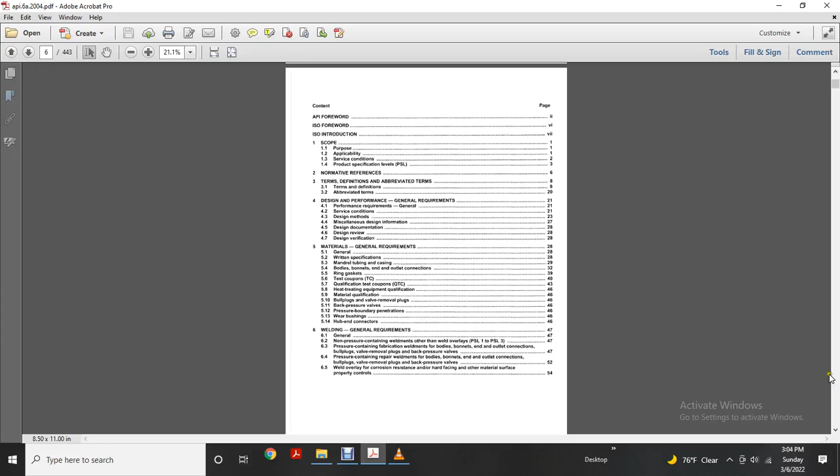Applicability, service conditions, product specification levels. 1. 2. Normative references. 3. Terms and definitions approved, abbreviated terms. 4. Design, performance, general requirements, general, service conditions, design method, miscellaneous, design information, design documentation, design review, design verification.

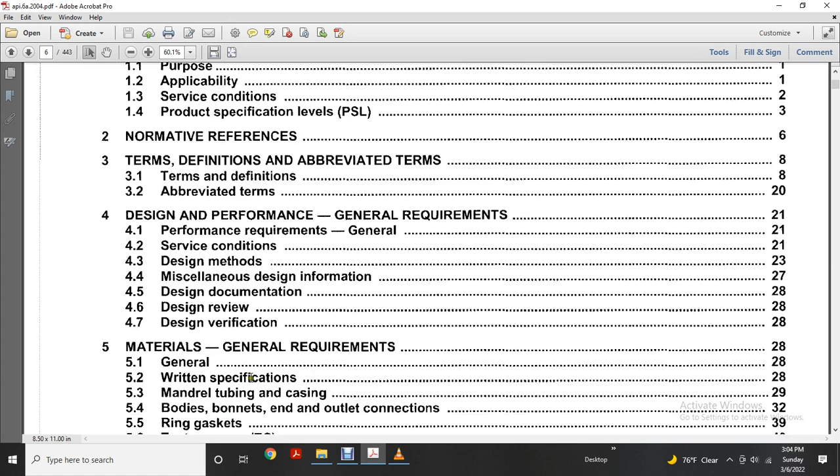Materials, general requirements, general written specification, mandrel tubing, casing, base, bodies, bonnets, outlet connections, ring gaskets, test coupons, qualification test coupons, heat-treating equipment qualification, material qualification, bull plugs, valve removal plugs, back pressure valves, pressure boundary, penetrations, wear bushings.

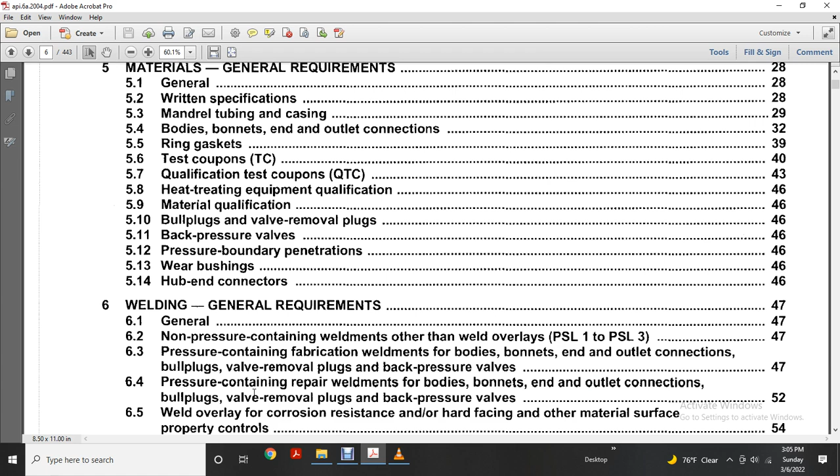Hub ended connectors, welding, general requirements, general non-pressure containing weldments other than weld overlays, PSL 1 to PSL 3. Pressure containing fabrication weldments for bodies, bonnets, end and outlet connections, bull plugs, valve removal plugs, back pressure valves. Pressure containing repair weldments, bodies, bonnets, end and outlet connections, weld overlay, corrosion resistant and or hard facing other materials.

For the property controls. 7. Quality control, general measuring, testing equipment, general quality control, personnel qualifications, personnel control requirements, general quality control required, records requirement.

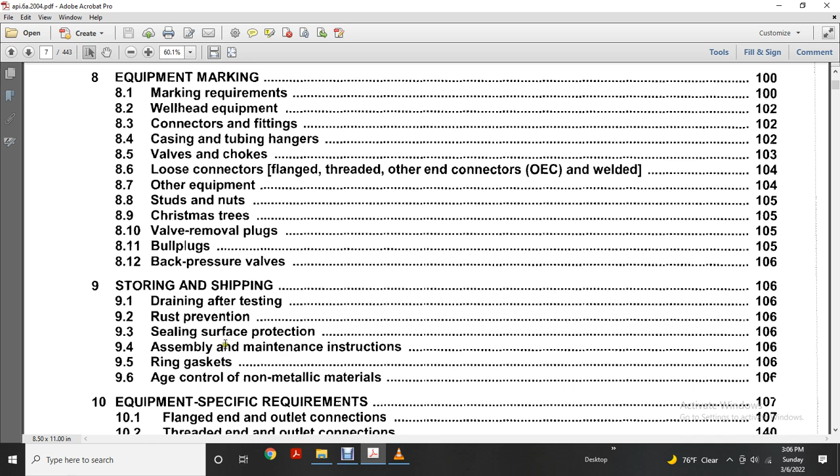Equipment marking requirements, wellhead equipment connectors, fittings, casing, tubing hangers, valves, chokes, loose connectors, flanged, other end connectors, welded, other equipment, studs, nuts, Christmas trees, valve removal plugs, bull plugs, back pressure valves, storing and shipping, draining and testing, draining after testing, rust prevention, sealing, surface protection, assembly, maintenance, and instruction, ring gasket, age control, non-metallic materials.

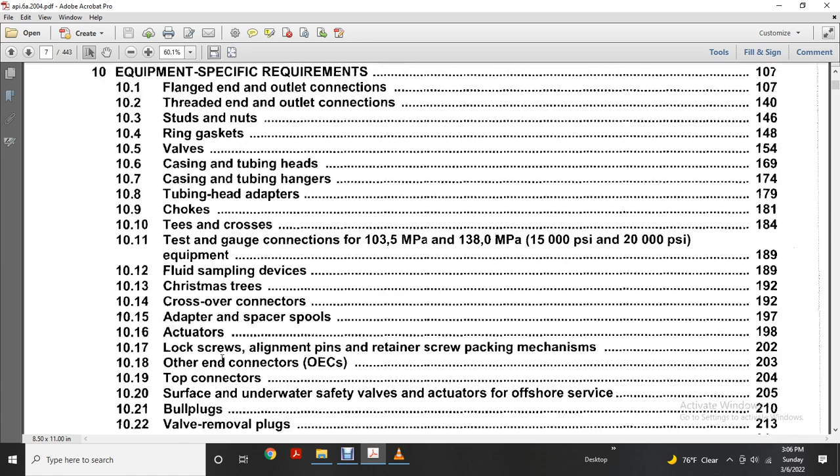10. Equipment-specific requirements, flange end outlet connection, thread end outlet connection, studs and nuts, ring gasket, valves, casing and tubing heads, casing and tubing hangers, tubing-head adapters, chokes, tees and crosses, test gauge connections, 103.5 MPa to 138 MPa, or 15,000 psi to 20,000 psi, fluid sample device, Christmas tree, crossovers, connectors, adapters, spools, actuator, lock screws.

Alignment pins, retaining screws, packing mechanism, other end connectors or OECs, top connectors, surface and underwater safety valves, actuators, offshore, surface bull plugs, valve removal plugs, other pressure boundary, penetration, back pressure valves.

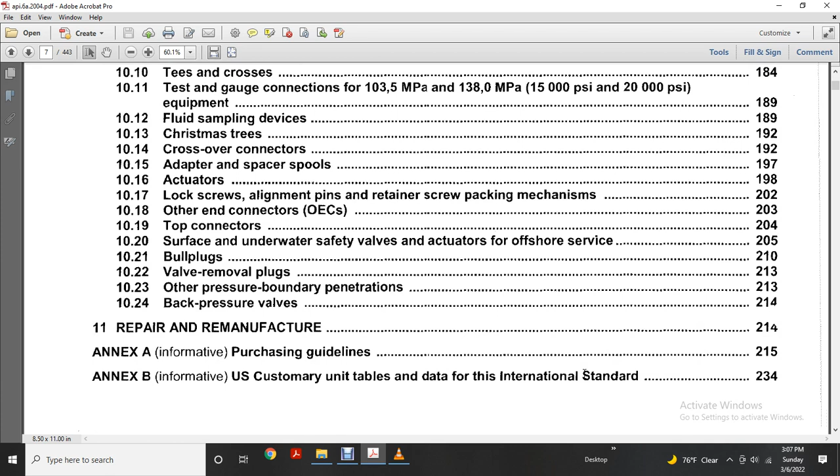Purchasing guidelines, U.S. customary unit table of data, international standard. And these are appendixes, and we'll start out with paragraph chapter 1, after the foreword, introduction.

Petroleum, natural gas industries, drilling and production equipment, wellhead Christmas tree equipment scope. The purpose of the international standards specifies requirements given the recommendation, performance, dimensional with a functional, interchangeable design, material with the testing, inspection, welding, marking, handling, storage, shipment, purchasing, repair and remanufacture, wellhead Christmas tree equipment for use in the petroleum, natural gas industry.

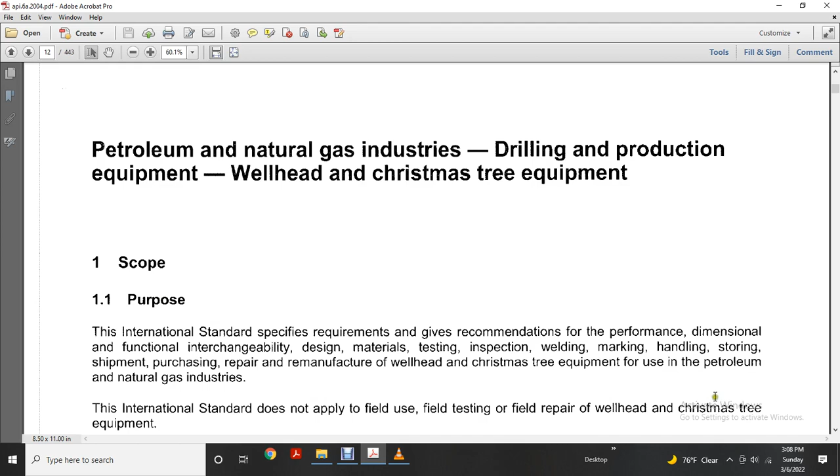International standards do not apply to field testing, field repair, wellhead Christmas tree equipment. Applicability of international standards applicable to the following specific equipment: wellhead equipment, casing head housing, casing head spools, tubing.

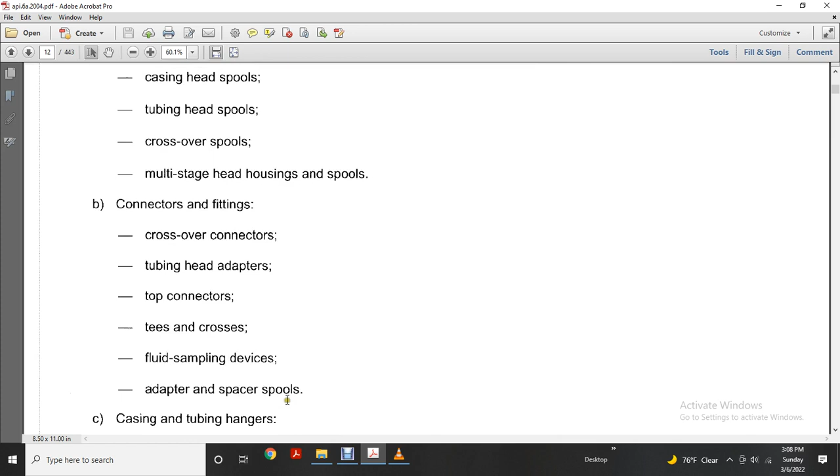Head spools, crossover spools, multiple stage head housings and spools, connector fittings, crossover connectors, tubing head adapters, top connectors, tees and crosses, fluid sample devices, adapters, spacers and spools, casing, tubing hangers, mandrel hangers and slip hangers, valves and chokes, single valve, multiple valves, actuated valves, valves prepared for actuator, check valve, chokes, surface and underwater safety valves, actuator.

Back pressure valves, loose connection, flange, threaded, other end connectors and welded, weld neck connectors, blind connectors, threaded connectors, adapter spacer connectors, bullplugs, valve removal plugs, other equipment actuators, hubs, pressure boundary, penetrations, ring gasket, running, testing tools, Annex H, wear bushings and Annex H.

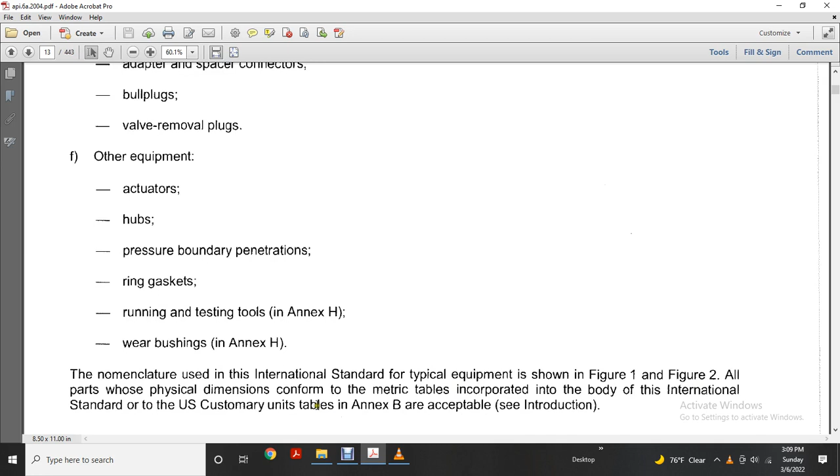Nomenclature used in the international standards for the typical equipment shown in Figure 1 and 2, all parts whose physical dimension conform with the metric tables incorporated with the body of the international standards or the U.S. customary unit tables in Annex B, or we'll see this introduction.

1.3 Service conditions. International standards define service conditions, in terms of pressure, temperature, material class for the well-bore constituents, and operating conditions. 1.4 Product specification levels, or PSL.

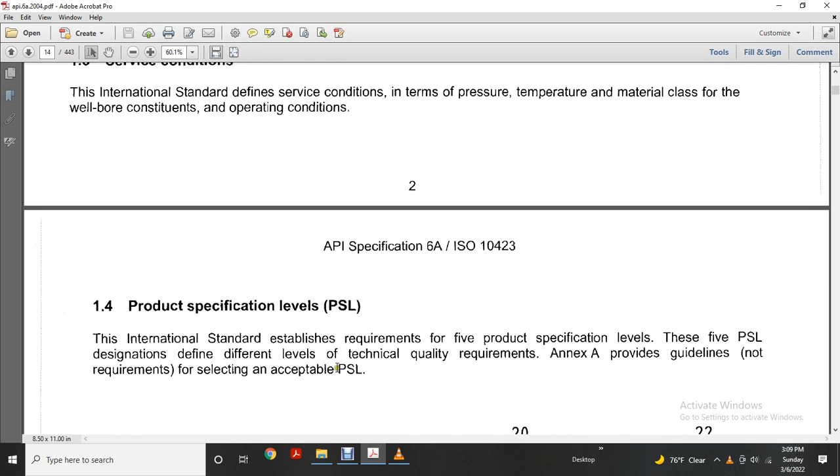International standards establish requirements of 5 product specification levels. These 5 product specification level designations define different levels of technical quality requirements. Annex A provides guidelines, not requirements, for selecting acceptable product specification levels. And it shows the different pictures.

Typical wellhead assembly nomenclature.

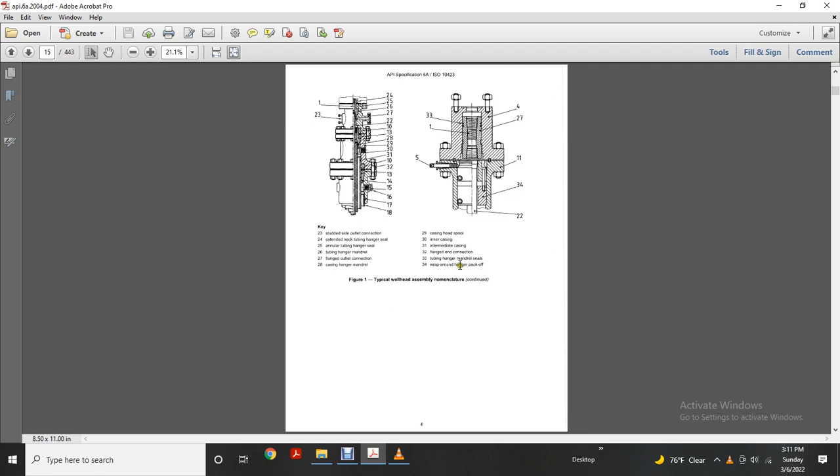2, normative references. We'll read this as part of 1 because 1 was small. The following referenced documents are indispensable for the application of this document. For dated references, only the edition cited applies. For undated references, the latest edition of the referenced document, including any amendments, applies. ISO 2859-1:1999, Sampling procedures for inspection by attributes, Part 1: Sampling schemes indexed by acceptance quality limit for lot-by-lot inspection.

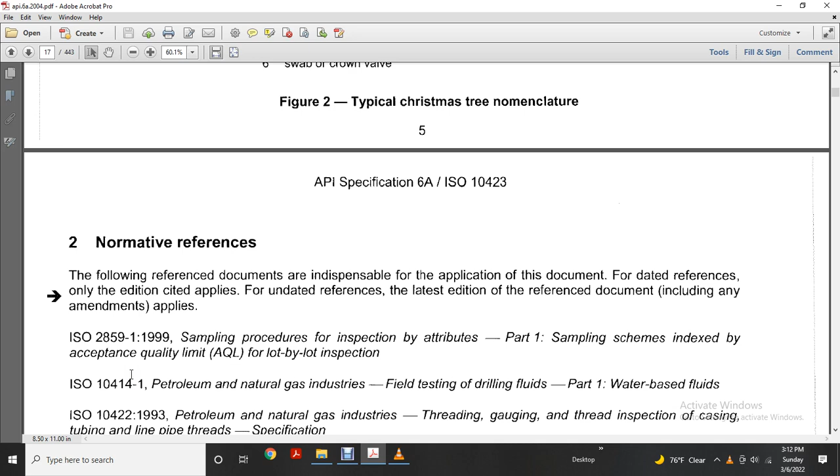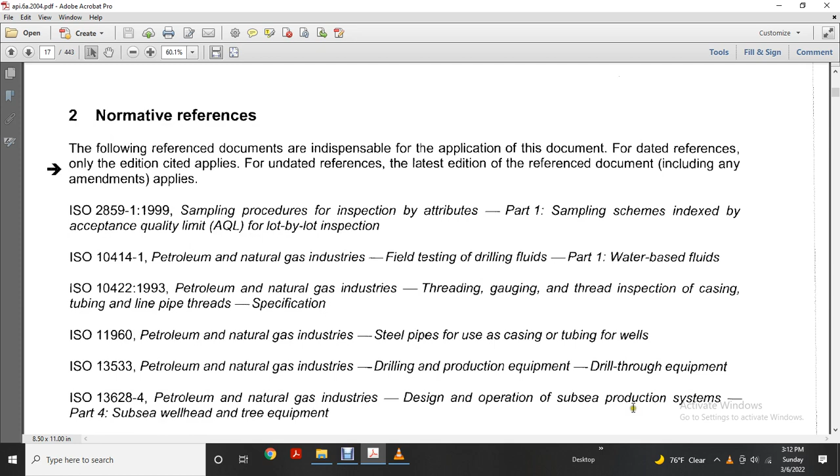ISO 10414-1, Petroleum and natural gas industries, Field testing of drilling fluids, Part 1: Water-based fluids. ISO 10422:1993, Petroleum and natural gas industries, Threading, gauging and thread inspection of casing, tubing and line pipe threads, Specification. ISO 11960, Petroleum and natural gas industries, Steel pipes for use as casing or tubing for wells. ISO 13533, Petroleum and natural gas industries, Drilling and production equipment, Drill-through equipment. ISO 13628-4, Petroleum and natural gas industries, Design and operation of subsea production systems, Part 4: Subsea wellhead and tree equipment.

ISO 13678, Petroleum and natural gas industries, Evaluation and testing of thread compounds for use with casing, tubing and line pipe. API Spec 7, 1997, Specification for rotary drill stem elements. American Petroleum Institute Recommended Practice 14F, Recommended practice for design and installation of electrical systems for fixed and floating offshore petroleum facilities for unclassified and Class 1, Division 1 and Division 2 locations. American Society of Mechanical Engineers B1.1, Unified inch screw threads.

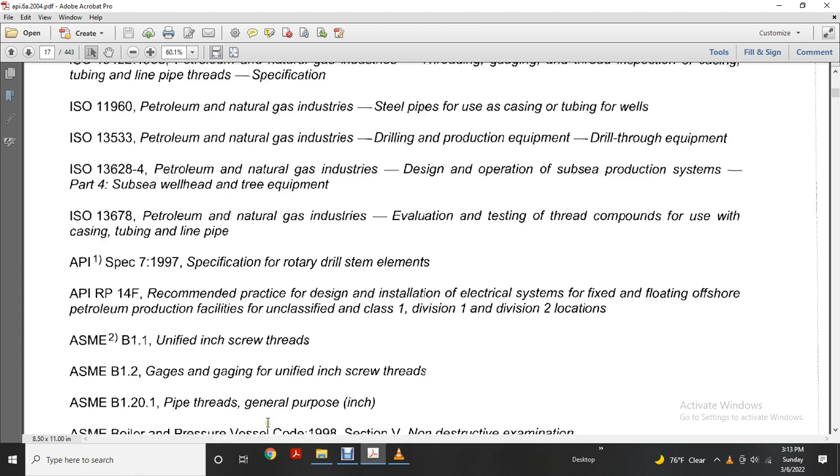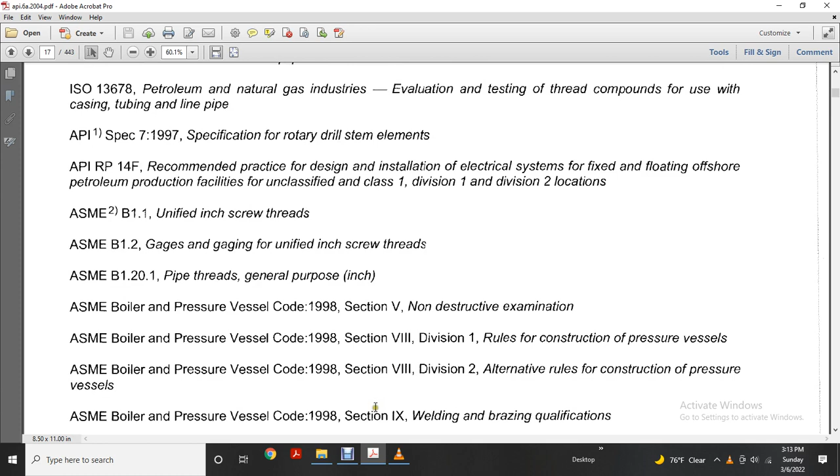B1.2, Gauges and gauging for unified inch screw threads. B1.20.1, Pipe threads, general purpose, inch. American Society of Mechanical Engineers Boiler and Pressure Vessel Code 1998, Section V, Nondestructive examination. Boiler and Pressure Vessel Code 1998, Section VIII, Division 1, Rules for construction of pressure vessels. Section VIII, Division 2, Alternative rules for construction of pressure vessels. Boiler and Pressure Vessel Code 1998, Section IX, Welding and brazing qualifications. ASNT SNT-TC-1A, Personnel qualification and certification in nondestructive testing.

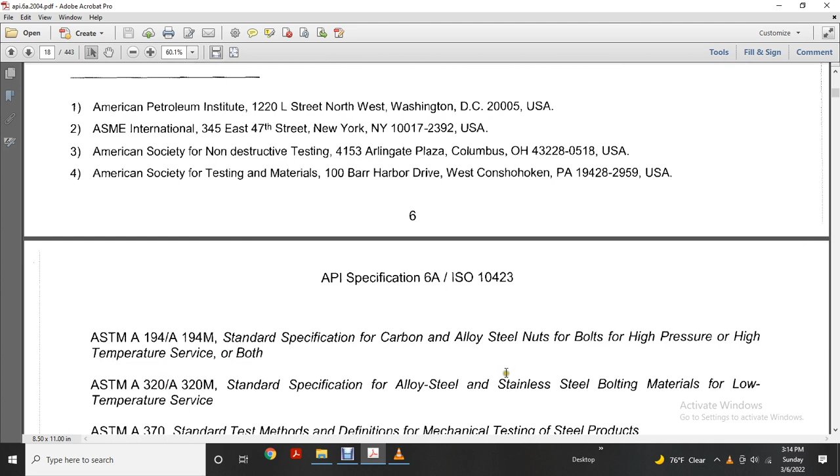American Society for Testing and Materials A193/A193M, Standard specification for alloy steel and stainless steel bolting materials for high temperature service. ASTM A194/A194M, Standard specification for carbon and alloy steel nuts for bolts for high pressure or high temperature service, or both. ASTM A320/A320M, Standard specification for alloy steel and stainless steel bolting materials for low temperature service. ASTM A370, Standard test methods and definitions for mechanical testing of steel products. A388/A388M, Standard practice for ultrasonic examination of heavy steel forgings.

ASTM A453/A453M, Standard specification for high temperature bolting materials with expansion coefficients comparable to austenitic stainless steels. A703/A703M, Standard specification for steel castings, general requirements, for pressure-containing parts. ASTM D395, Standard test methods for rubber property, compression set. D412, Standard test methods for vulcanized rubber and thermoplastic elastomers, tension. D471, Standard test method for rubber property, effect of liquids. D1414, Standard test methods for rubber O-rings. D1415, Standard test method for rubber property, international hardness. D1418, Standard practice for rubber and rubber latices, nomenclature.

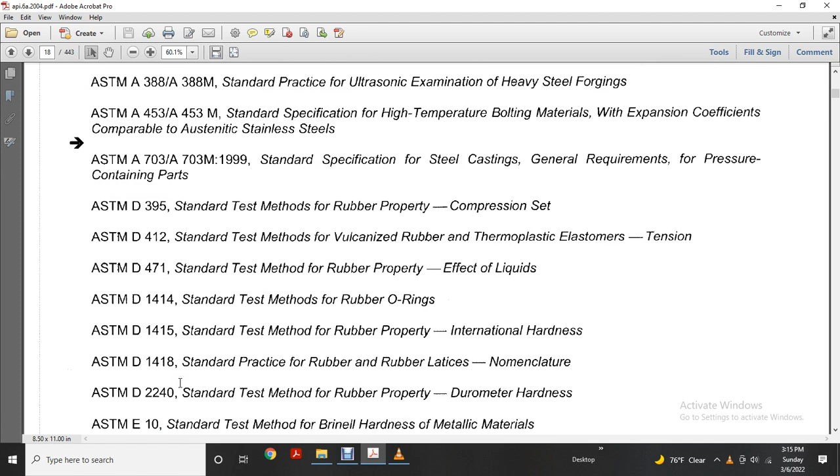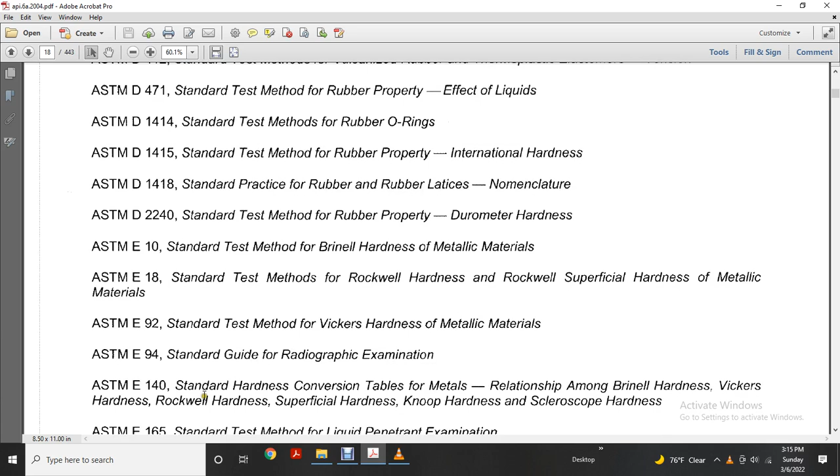D2240, Standard test method for rubber property, durometer hardness. E10, Standard test method for Brinell hardness of metallic materials. E18, Standard test methods for Rockwell hardness and Rockwell superficial hardness of metallic materials. E92, Standard test method for Vickers hardness of metallic materials. E94, Standard guide for radiographic examination. E140, Standard hardness conversion tables for metals, relationship among Brinell hardness, Vickers hardness, Rockwell hardness, superficial hardness, Knoop hardness, and scleroscope hardness. E165, Standard test method for liquid penetrant examination.

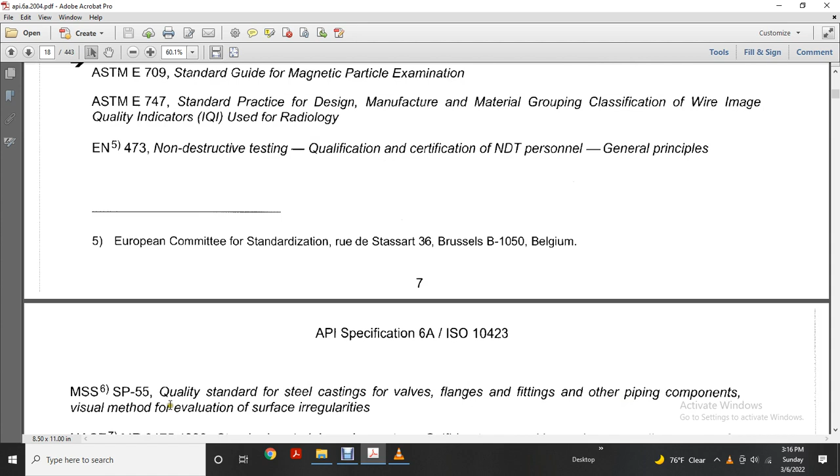E428, Standard practice for fabrication and control of steel reference blocks used in ultrasonic examination. E709, Standard guide for magnetic particle examination. E747, Standard practice for design, manufacture and material grouping classification of wire image quality indicators used for radiology. EN 473, Non-destructive testing, qualification and certification of NDT personnel, general principles. MSS SP-55, Quality standard for steel castings for valves, flanges, fittings, and other piping components, visual method for evaluation of surface irregularities. NACE MR0175, 1999, Standard material requirements, sulfide stress cracking resistant metallic materials for oilfield equipment. The Society of Automotive Engineers, AS568A, 1974, Aerospace size standard for O-rings.

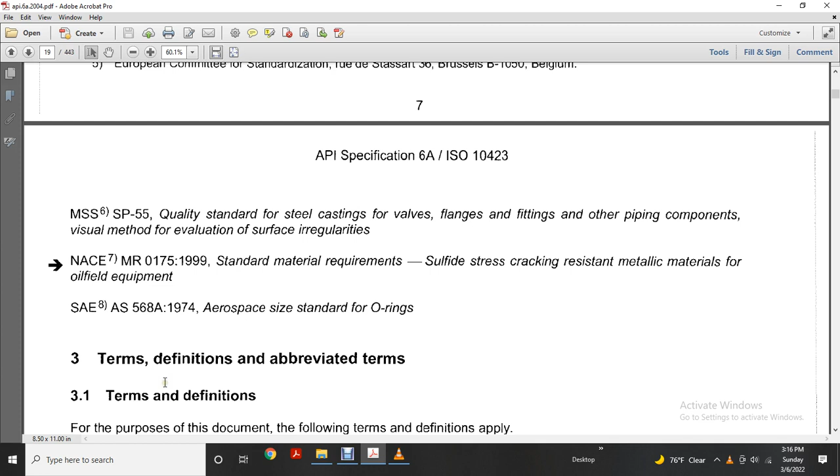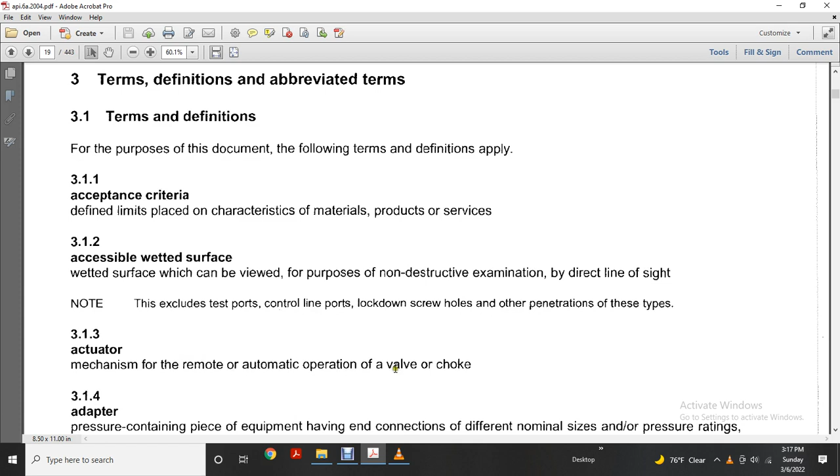And we'll continue to read terms and definitions, abbreviated terms. For the purpose of this document, the following terms and definitions apply. Acceptance criteria: defined limits placed on characteristics of materials, products or services. Accessible wetted surface: wetted surface which can be viewed for the purpose of non-destructive examination by direct line of sight. Note: these exclude test ports, control line ports, lockdown screw holes and other penetrations of these types. Actuator: mechanism for the remote or automatic operation of a valve or choke. Adapter: pressure-containing piece of equipment having end connections of different nominal sizes or pressure ratings, used to connect other pieces of equipment of different nominal sizes and/or pressure ratings.

Annular pack-off: the mechanism that seals the annular pressure between the outside diameter of the suspended tubular member or hanger and the inside diameter of the head or spool through which the tubular member passes or the hanger is suspended. As-shipped condition: the condition of the product or equipment when it is ready to ship.

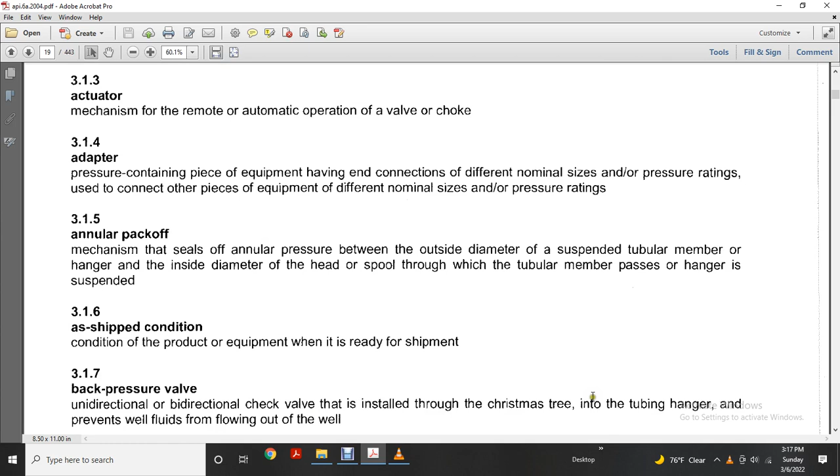Back pressure valve: a unidirectional or bidirectional check valve installed through the Christmas tree into a tubing hanger that prevents well fluids from flowing out of the well. Body: any portion of the wellhead and Christmas tree equipment between the end connections, with or without internal parts, that contains wellbore pressure. Bolting: closure threaded fasteners used to assemble the wellbore pressure-containing parts or join end and outlet connections.

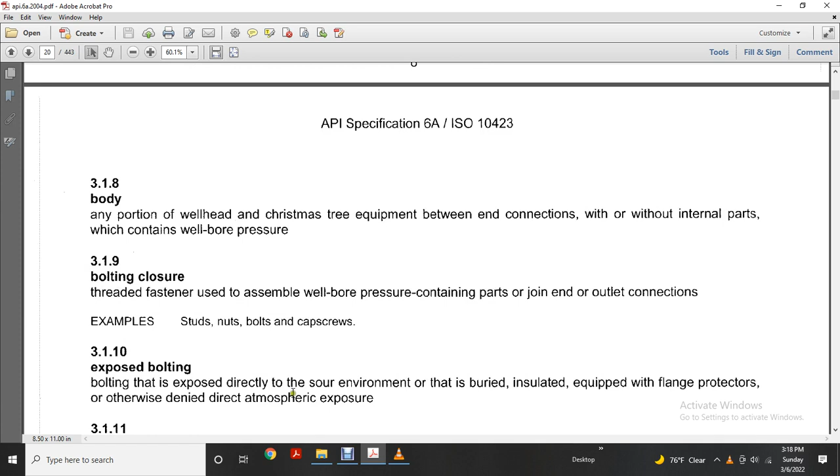Exposed bolting: bolting that is exposed directly to a sour environment, or that is buried, insulated, equipped with flange protectors, or otherwise denied direct atmospheric exposure. Non-exposed bolting: bolting that is not directly exposed to sour environments and is not intended to be buried, insulated, equipped with flange protectors, or otherwise denied direct atmospheric exposure.

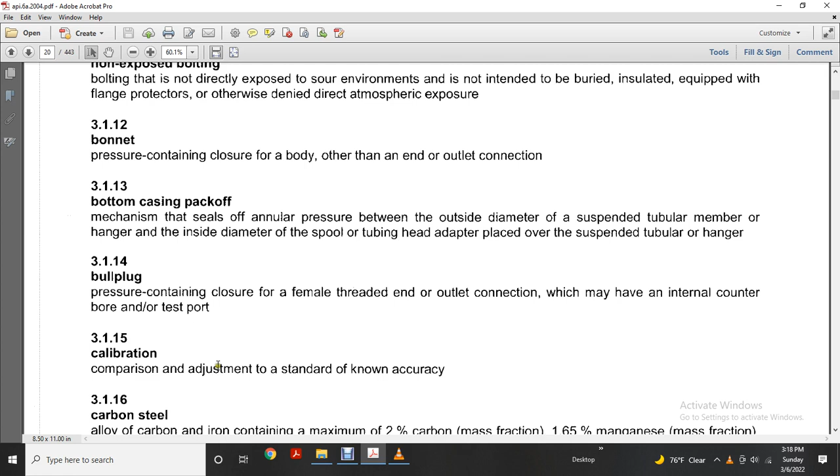Bonnet: pressure-containing closure of a body, other than an end or outlet connection. Bottom casing pack-off: mechanism that seals the annular pressure between the outside diameter of the suspended tubular member or hanger and the inside diameter of the spool or tubing head adapter placed over the suspended tubular or hanger. Bull plug: pressure-containing closure for a female threaded end or outlet connection, which may have an internal counterbore and test port. Calibration: comparison and adjustment to a standard of known accuracy.

Carbon steel: alloy of carbon and iron containing a maximum of 2% carbon mass fraction, 1.65% manganese mass fraction, and residual quantities of other elements, except those intentionally added in specific quantities for deoxidation, usually silicon and/or aluminum. Casing: pipe run from the surface intended to line the walls of a drilled hole.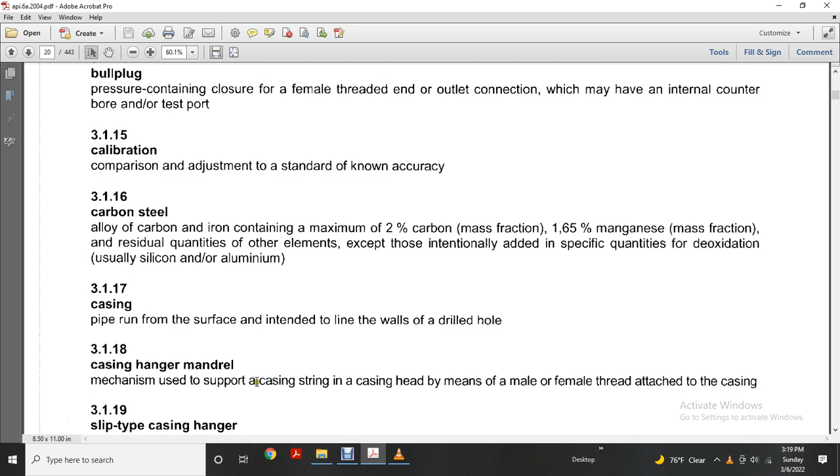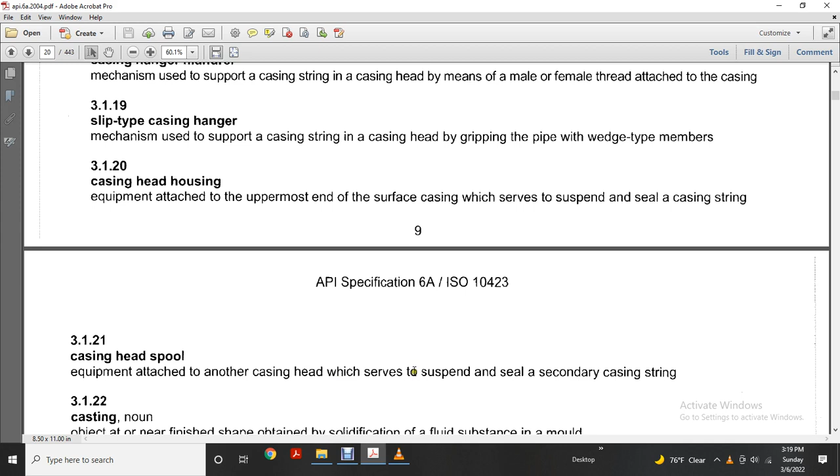Casing hanger mandrel: mechanism used to support a casing string in a casing head by means of a male or female thread attached to the casing string. Slip-type casing hanger: mechanism used to support a casing string in a casing head by gripping the pipe with wedge-type members. Casing head housing: equipment attached to the uppermost end of the surface casing which serves to suspend and seal a casing string. Casing head spool: equipment attached to another casing head which serves to suspend and seal a secondary casing string.

Casting, noun: object at or near finished shape obtained by solidification of a fluid substance in a mold. Note: HIP components are not considered to be castings. Chemical analysis: determination of the chemical composition of the material.

Choke: equipment used to restrict and control the flow of fluids. Choke bean, flow bean: replaceable orifice part used in positive chokes to control flow rate. Choke trim: pressure-controlling choke components, including choke beans, used to control or regulate the flow of fluids. Note: one-piece stems or segments of multi-piece stems that pass through the pressure boundary are pressure-containing components.

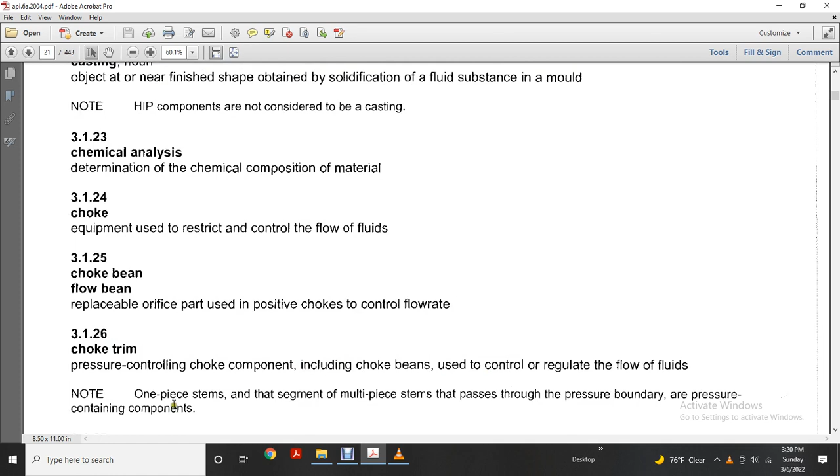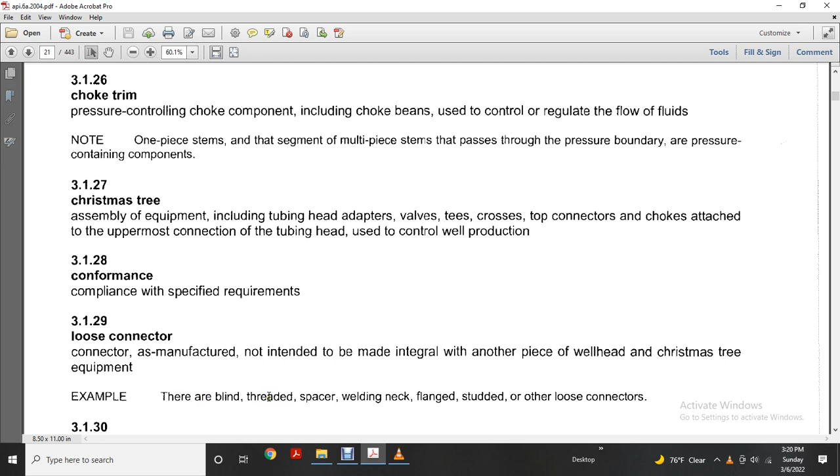Christmas tree: assembly of equipment, including tubing head adapters, valves, tees, crosses, top connectors and chokes, attached to the uppermost connection of the tubing head, used to control well production. Conformance: compliance with specified requirements. Loose connector: connector as manufactured that is not intended to be made integral with another piece of wellhead or Christmas tree equipment. Note: examples are blind, threaded, spacer, welding neck, studded, or other loose connections.

Corrosion-resistant alloy or CRA: non-ferrous-based alloy in which any one or the sum of the specified amounts of the elements titanium, nickel, cobalt, chromium, and molybdenum exceeds 50% mass fraction.

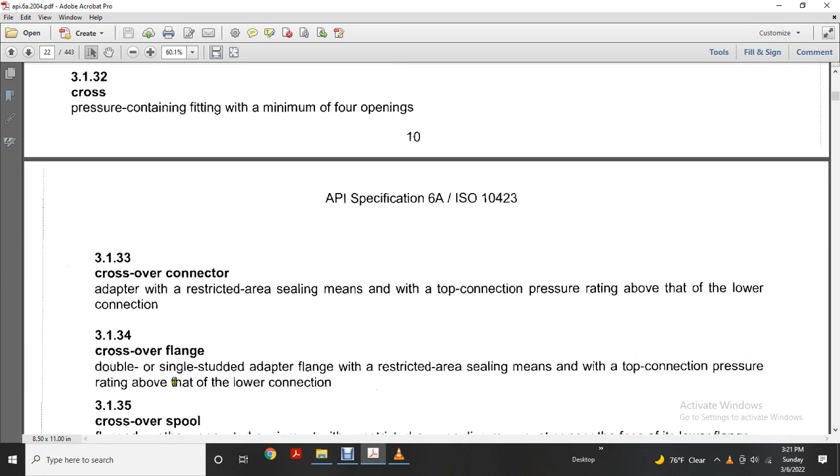Corrosion-resistant ring grooves: ring grooves lined with a metal resistant to metal-loss corrosion, a corrosion-resistant alloy or austenitic stainless steel. Cross: pressure-containing fitting with a minimum of four openings. Crossover connector: adapter with a restricted-area sealing means and with a top connection pressure rating above that of the lower connection. Crossover flange: double- or single-studded adapter flange with a restricted-area sealing means and with a top connection pressure rating above that of the lower connection. Crossover spool: flanged or other connected equipment with a restricted-area sealing means at or near the face of the lower flange.

Note: crossover spools are provided with a suitable means to suspend and seal around an inner string of casing or tubing, with the top connection pressure rating above that of the lower connection. Date of manufacture: date of the manufacturer's final acceptance of finished equipment. Date of repair or remanufacture: date of the repairer or remanufacturer's final acceptance of finished equipment.

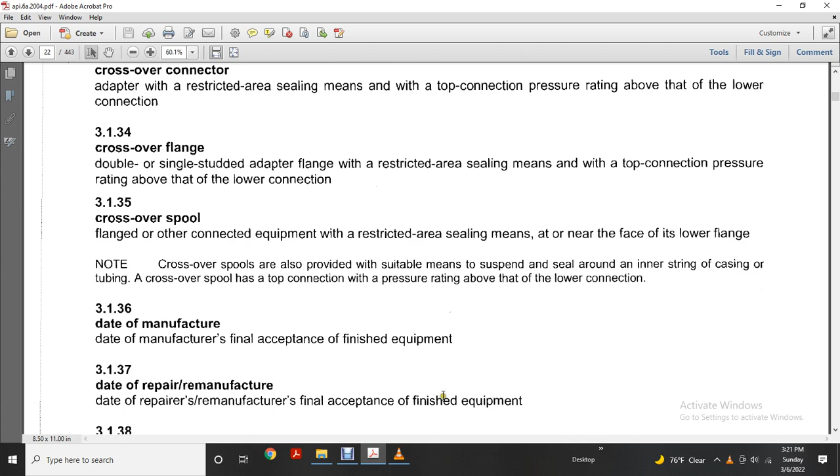Dynamic seal: seal in which motion exists relative to the sealing surface after installation. End connection, outlet connection: integral male or female thread, hub end connector, flange, studded, threaded, or through-bolted, or any other means used to join together equipment that contains or controls pressure.

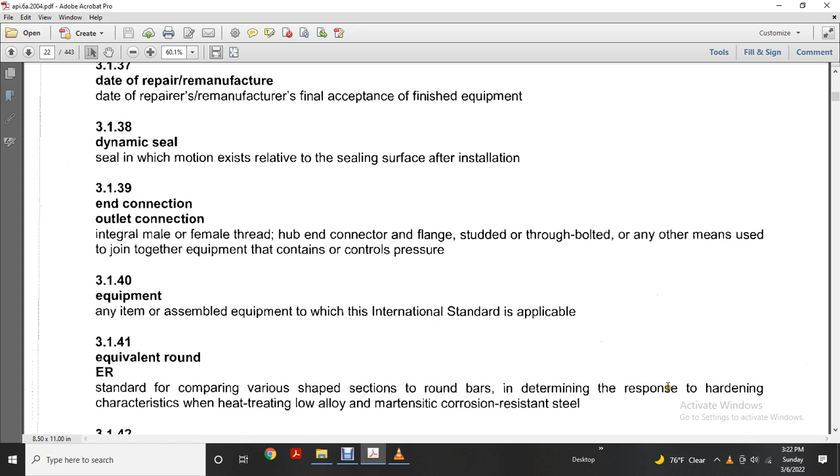Any item assembled equipment to which this International Standard is applicable. The equivalent round, or ER, standard for comparing various shapes of section to the round bar, in determining the response to hardening characteristics when heat treating low alloy and martensitic corrosion resistant steel. Fit: the geometric relation between parts. Note that this includes the tolerance criteria used during the design of a part and its mating part.

Flange: protruding rim with holes to accept bolts, having a sealing mechanism, used to join pressure containing equipment, with dimensions specified by the international standards. Blind flange: flange with no center bore, used to completely close off a flanged end or outlet connection. Loose flange: flange not intended to be made integral with the equipment component, per the international standard.

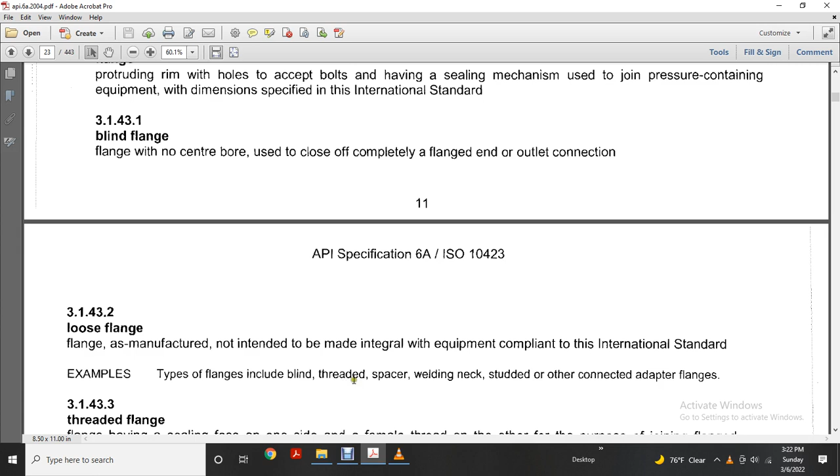The types of flange include blind, threaded, spacer, welding neck, studded, and other connected adapter flanges. Threaded flange: flange having a sealing face on one side and a female thread on the other for the purpose of joining flanged connections to threaded connections. Welding neck flange: flange with a neck on the side opposite the sealing face, prepared with a bevel to weld to corresponding pipe or transition pieces.

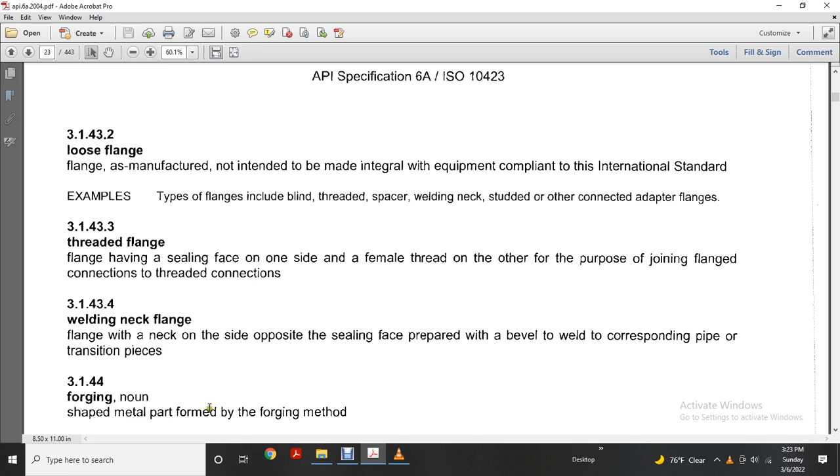Forging, noun: shaped metal part formed by the forging method. Forge, verb: deform metal plastically into desired shapes with compressive force. Note: forging is usually a hot process; use of dies is optional. Form: essential shape of the product, including all its component parts. Function: operation of a product during service. Gauge and test port connection: hole drilled and tapped in the wellhead

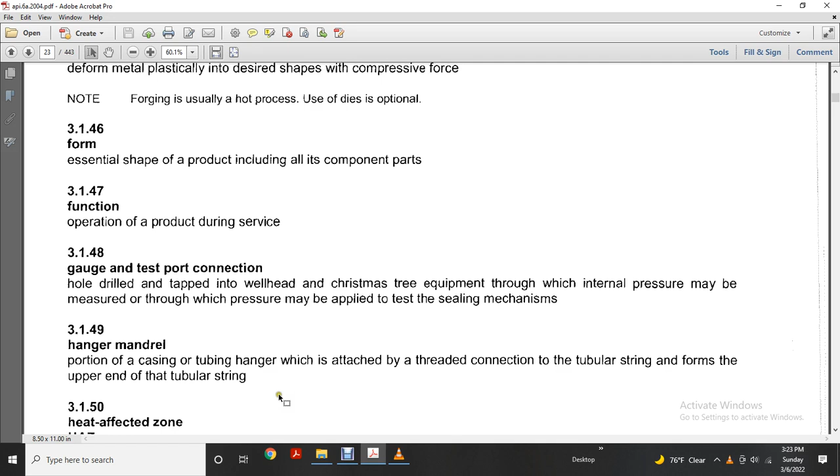or Christmas tree equipment through which internal pressure may be measured or through which pressure may be applied to test the sealing mechanism. Hanger mandrel: portion of the casing or tubing hanger that is attached by a threaded connection to the tubular string and forms the upper end of the tubular string. Heat affected zone: portion of the base metal which has not been melted during welding but whose mechanical properties or microstructure have been altered by heating, welding, or cutting.

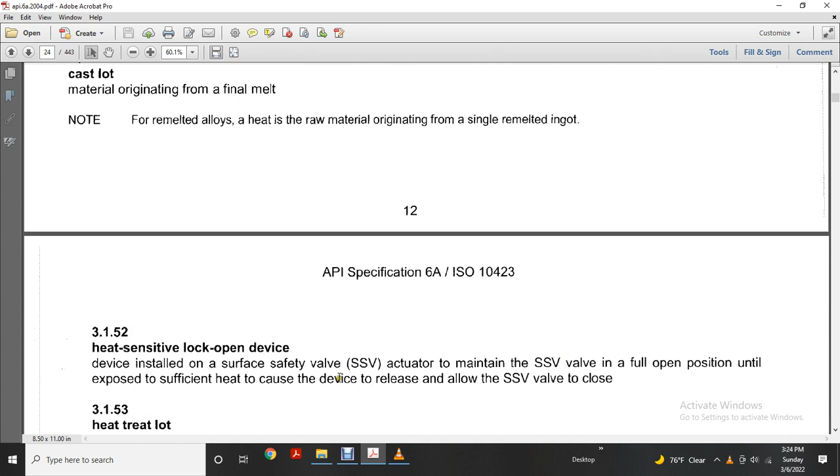Heat, cast lot: material originating from a final melt. For remelted alloys, heat is raw material originating from a single remelted ingot. Heat sensitive lock open device: device installed on the surface safety valve actuator that holds the surface safety valve in the full open position until exposed to sufficient heat, which causes the device to release and allows the surface safety valve to close.

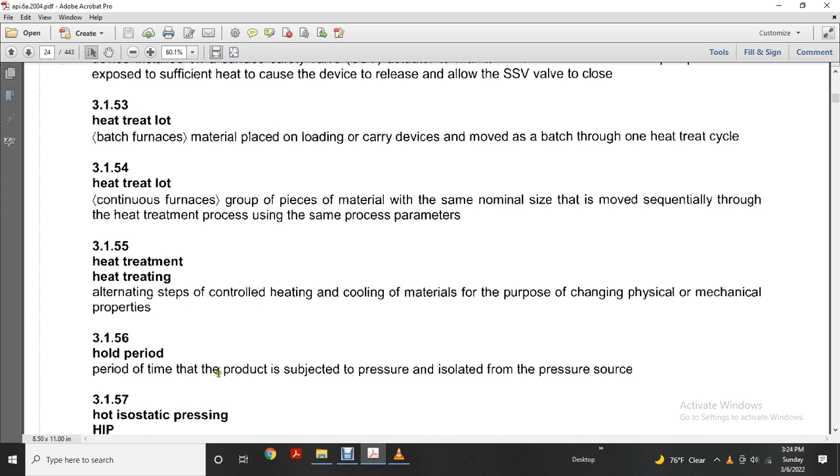Heat treat lot, batch furnaces: material placed on loading or carrying devices and moved as a batch through one heat treat cycle. Heat treat lot, continuous furnaces: group of pieces of material with the same nominal size that moves sequentially through the heat treatment process using the same process parameters. Heat treating: alternating steps of controlled heating and cooling of material for the purpose of changing physical or mechanical properties. Hold period: period of time the product is subjected to pressure and isolated from the pressure source.

Hot isostatic pressing, or HIP: special forming process used to compact and metallurgically bond metal powder. Note: this process takes place in a flexible metal container which contains the powder formed in the desired shape, by subjecting the container to high temperature and pressure in an autoclave, producing a fully wrought structure. Hot work: deform metal plastically at a temperature above the recrystallization temperature.

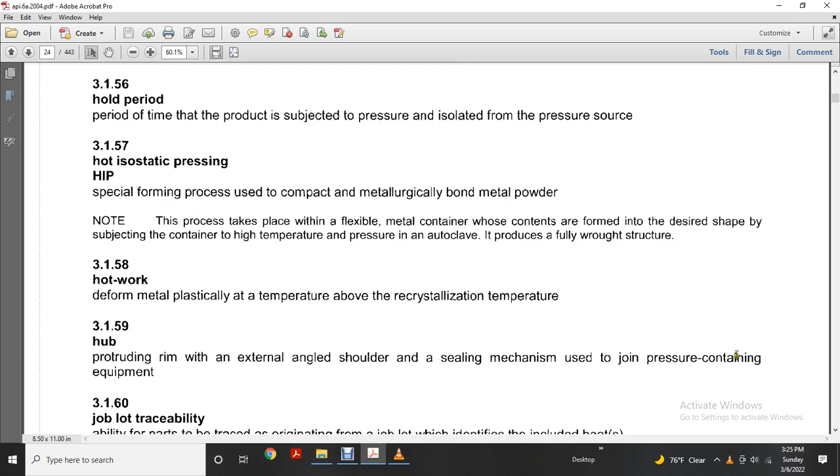Hub: protruding rim with an externally angled shoulder and sealing mechanism used to join pressure containing equipment. Job lot traceability: ability for parts to be traced as originating from a job lot which identifies the included heats. Linear indication: surface non-destructive examination indication whose length is equal to or greater than 3 times its width. Lock screw: threaded connection used to lock down hangers and energize seals.

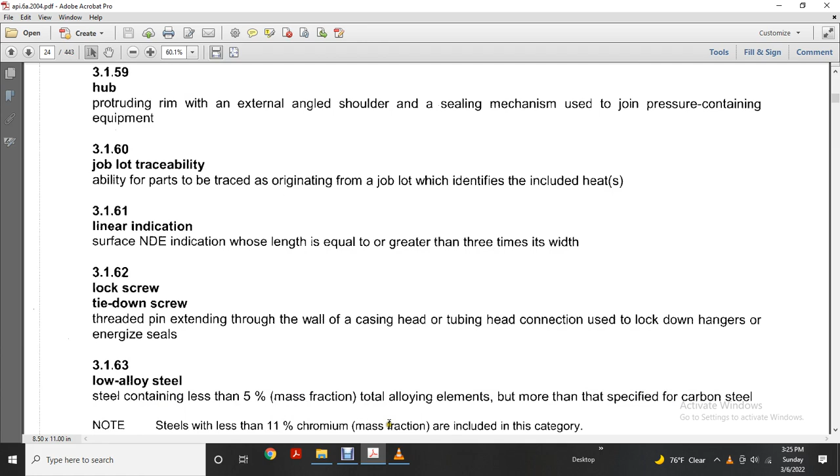Low alloy steels: steels containing less than 5% mass fraction total alloying elements, but more than specified for carbon steel. Note: steels with less than 11% chromium mass fraction are included in this category. Make and break, verb: connecting and disconnecting a connection. Manufacturing operation: activity involved in, but not limited to, machining, welding, heat treating, or other processes utilized to produce finished product. Material performance basis: capabilities which must be demonstrated, as a minimum, for material to satisfy the criteria of the international standards.

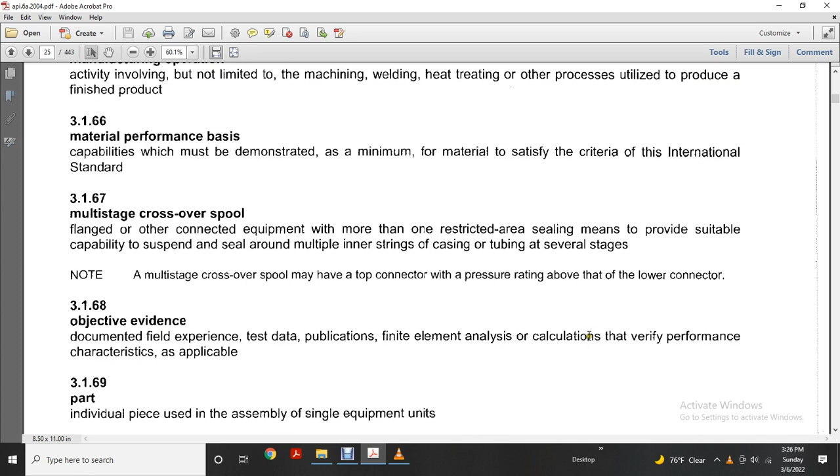Multi-stage crossover spool: flanged or other connected equipment with more than one restricted area sealing means, suitable to provide the capability to suspend and seal around multiple inner strings of casing or tubing in several stages. Note: multi-stage crossover spools may have the top connector pressure rating above the lower connector. Objective evidence: documented field experience, test data, publications, finite element analysis, or calculations that verify performance characteristics as applicable.

Part: individual piece used in the assembly of a single equipment unit, for example the body, bonnet, gate, stud, hand wheel, etc. A part may also be a piece not in finished form. Post weld heat treatment.

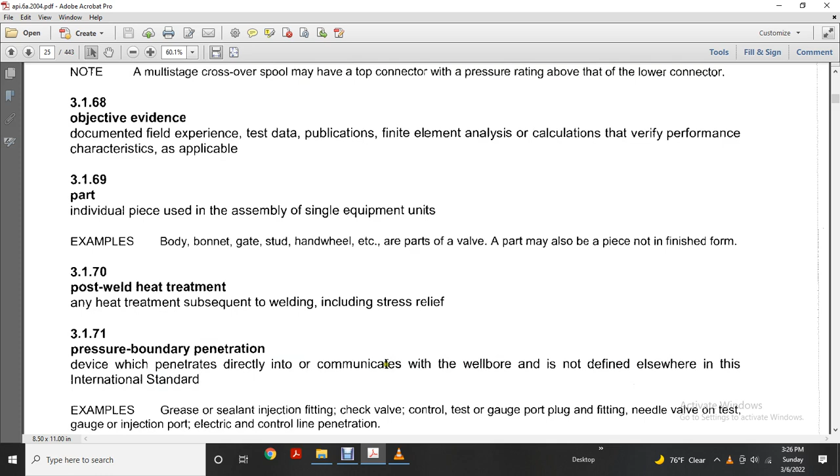Any heat treatment subsequent to welding includes stress relief. Pressure boundary penetration: a device that penetrates directly into or communicates with the wellbore and is not defined elsewhere in this international standard. Examples: grease or sealant injection fittings, check valves, control, test and gauge ports, plugs, needle valves, test, gauge and injection ports, electrical and control line penetrations. Pressure-containing part: a part whose failure to function as intended would result in the release of retained fluid into the atmosphere.

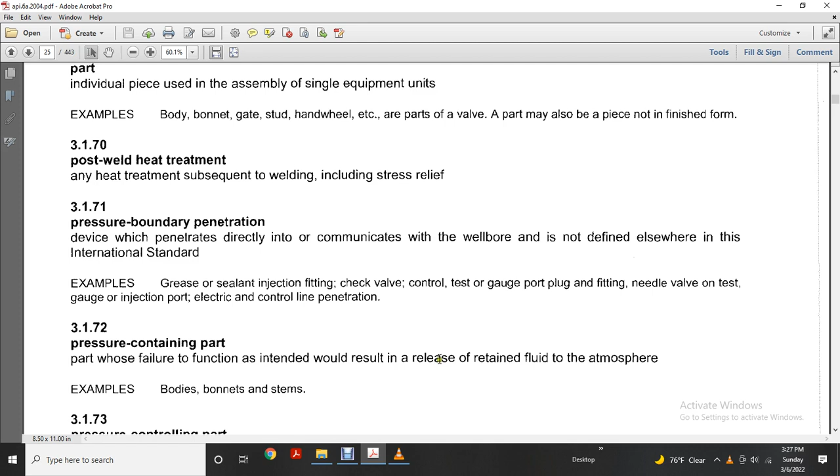Examples are bodies, bonnets, and stems. Pressure-controlling part: a part intended to control or regulate the movement of pressurized fluids. Examples are valve bore sealing mechanisms, choke trim, and hangers. Pressure integrity: the structural and leak-resistant capability of a product to contain applied pressure. Pressure vessel quality: metallic material specified for pressure-containing and pressure-controlling parts conforming with the applicable product specification and level of requirement.

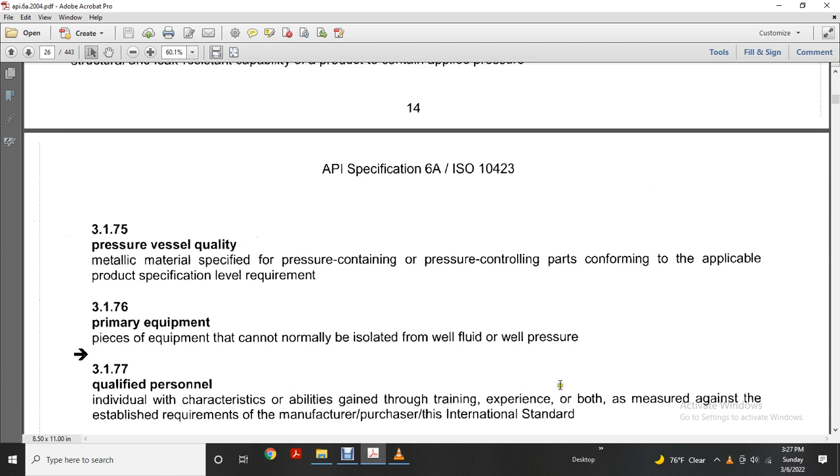Primary equipment: a piece of equipment that cannot normally be isolated from well fluid or well pressure. Qualified personnel: individuals with characteristics or abilities gained through training, experience, or both, as measured against the established requirements of the manufacturer or purchaser or this international standard. Rated working pressure: the maximum internal pressure the equipment is designed to contain and/or control. Working pressure is not to be confused with test pressure. Records: retrievable information. Relevant indication: a surface non-destructive examination indication with a major dimension greater than 1.6 mm, or 1/16th of an inch. Inherent indications not associated with a surface rupture are considered non-relevant.

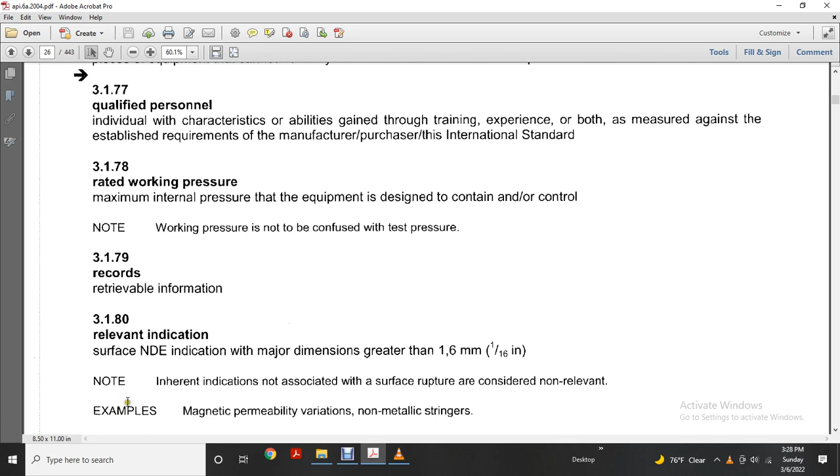Examples are magnetic permeability variations and non-metallic stringers. Remanufacture: an activity involving disassembly, reassembly, and testing of wellhead and Christmas tree equipment, with or without the replacement of parts, where machining, welding, heat treating, or other manufacturing operations are employed. Note: remanufacture does not include the replacement of bodies. Repair: an activity involving disassembly, reassembly, and testing of wellhead and Christmas tree equipment with or without replacement parts. Note: repair does not include machining, welding, heat treating, other manufacturing operations, or the replacement of bodies.

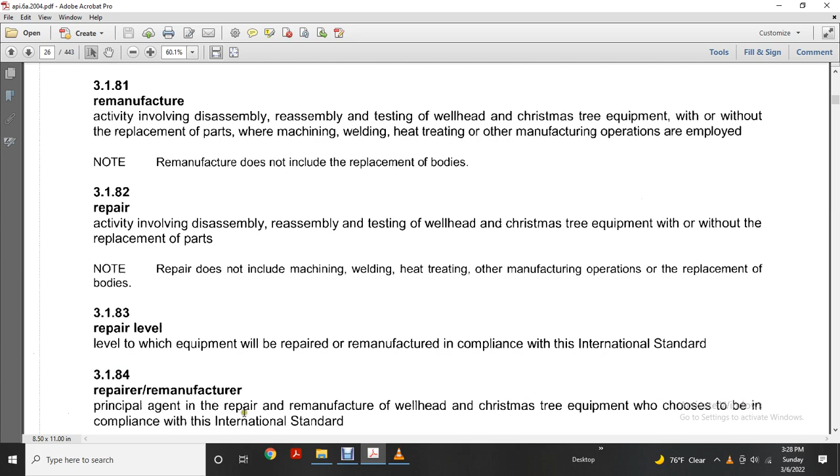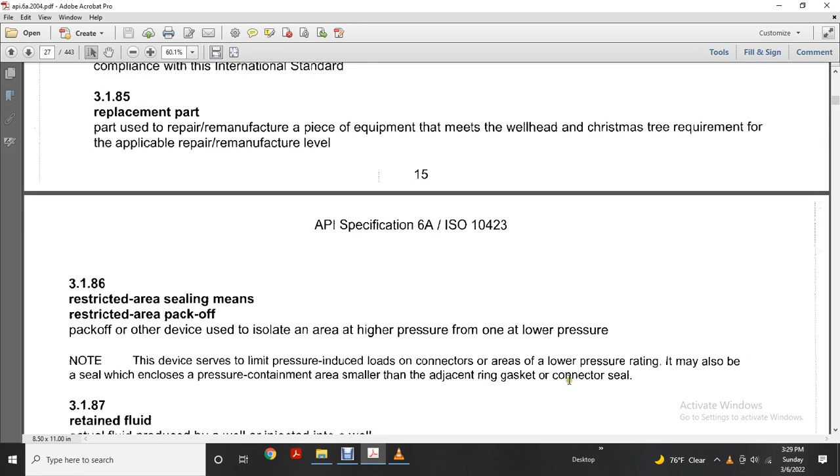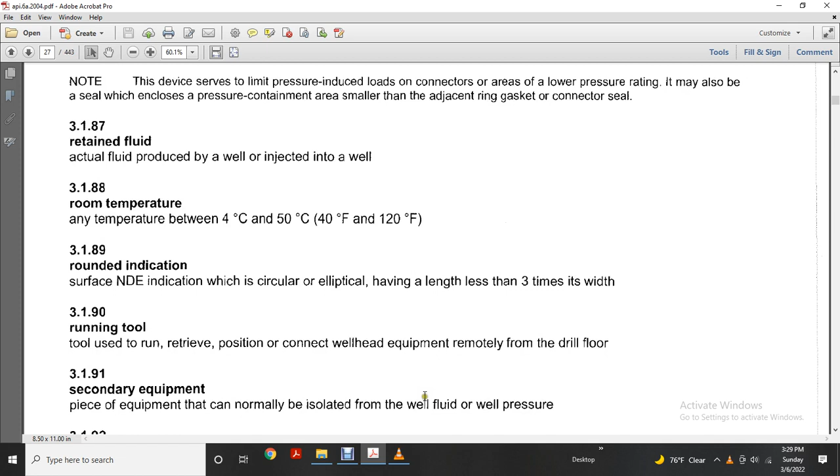Room temperature: between 4 degrees Celsius and 50 degrees Celsius, or 40 degrees Fahrenheit and 120 degrees Fahrenheit. Rounded indication: a surface non-destructive examination indication that is circular or elliptical, having a length less than 3 times the width. Running tool: a tool used to run, retrieve, position, or connect wellhead equipment remotely from the drill floor. Secondary equipment: a piece of equipment normally isolated from well fluid and well pressure. Serialization: assigning a unique code to individual parts or pieces of equipment to maintain records.

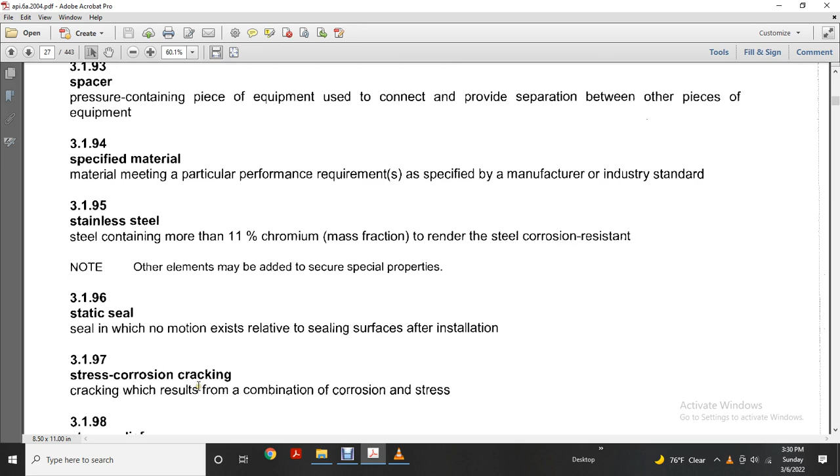Spacer: a pressure-containing piece of equipment used to connect and provide separation between other parts or pieces of equipment. Specified material: material meeting particular performance requirements specified by the manufacturer and industry standards. Stainless steel: steel that contains more than 11% chromium mass fraction to render the steel corrosion resistant. Other elements may be added to secure special properties. Static seal: a seal in which no motion exists relative to the sealing surface after installation. Stress corrosion cracking: cracking which results from the combination of corrosion and stress. Stress relief: controlled heating of material to a predetermined temperature for the purpose of reducing any residual stresses after welding.

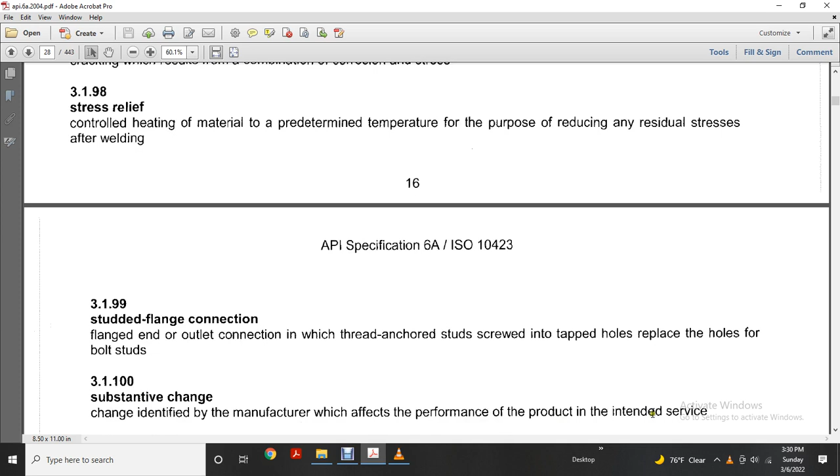Studded flange connection: a flanged end or outlet connection in which thread-anchored studs are screwed into tapped holes, replacing holes for bolts. Substantive change: a change identified by the manufacturer which affects the performance of the product in the intended service. Sulfide stress cracking: cracking of metallic materials due to exposure to fluid containing hydrogen sulfide. Surface safety valve, or SSV: an automatic wellhead valve assembly which closes upon loss of power supply. When used in this international standard, the term is understood as the SSV valve or USV valve. Surface safety valve actuator, underwater safety valve actuator.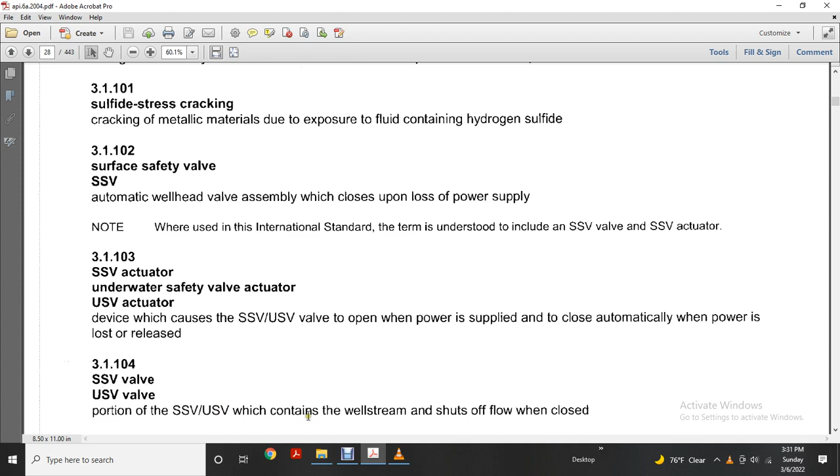The device used to actuate the surface safety valve or underwater safety valve, held open by a power supply, closes automatically when the power is lost or released. SSV and USV valve: the portion of the surface safety valve or underwater safety valve which contains the well stream and shuts off the flow when closed. Tee: a pressure-containing fitting with three openings. Two openings are opposite one another and form the run portion of the tee, and one opening is at 90 degrees to the line of the run. Tees may be equipped with threaded, flanged, studded, or other end connections.

Test tool: the tool used to run into the wellhead in order to perform a pressure test. Top connector, bottomhole test adapter.

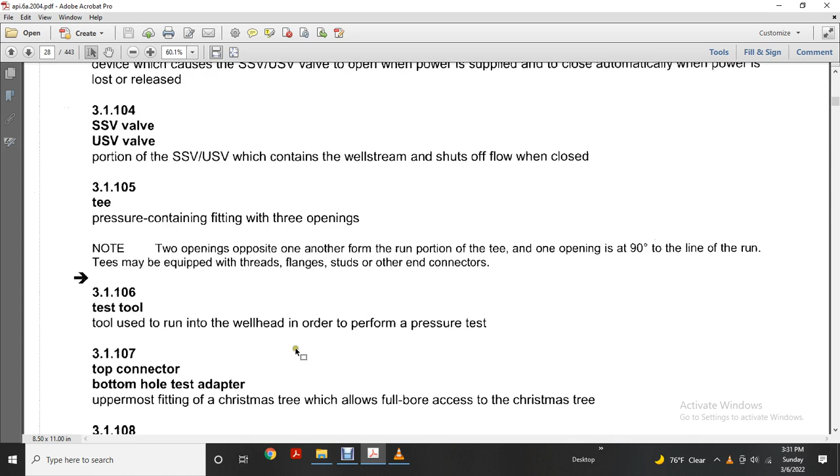Uppermost fitting of the Christmas tree, which allows full bore access to the Christmas tree. Thread protector: cap or insert, protective of the threads and seal during handling, transportation, storage. Pipe placed within the well conducting fluid between the producing formation and the Christmas tree, or conducting kill or treatment fluids into the well. Note that the tubing is distinguished from the casing by being retrievable during the life of the well.

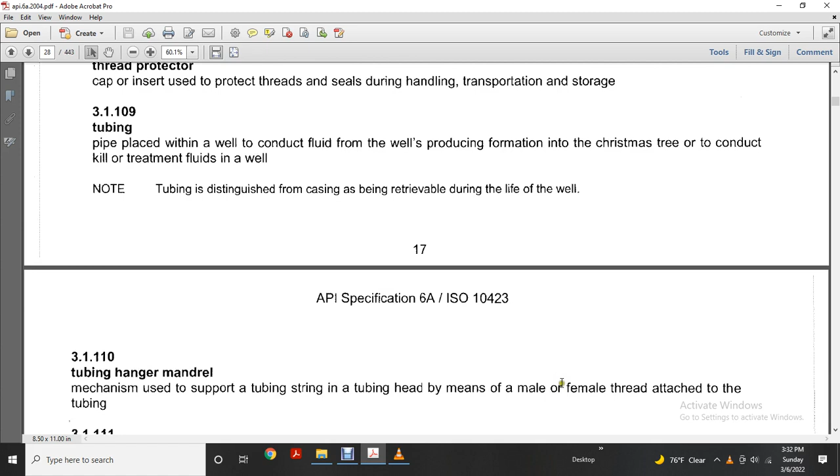Tubing hanger mandrel: mechanism used to support the tubing string in the tubing head by means of male or female threads attached to the tubing. Tubing head adapter: equipment which adapts the uppermost connection of the tubing head and the lowermost valve of the Christmas tree. Tubing head spool: a piece of equipment attached to the uppermost casing head or smallest casing string to suspend the tubing and seal the annular space between the tubing and casing.

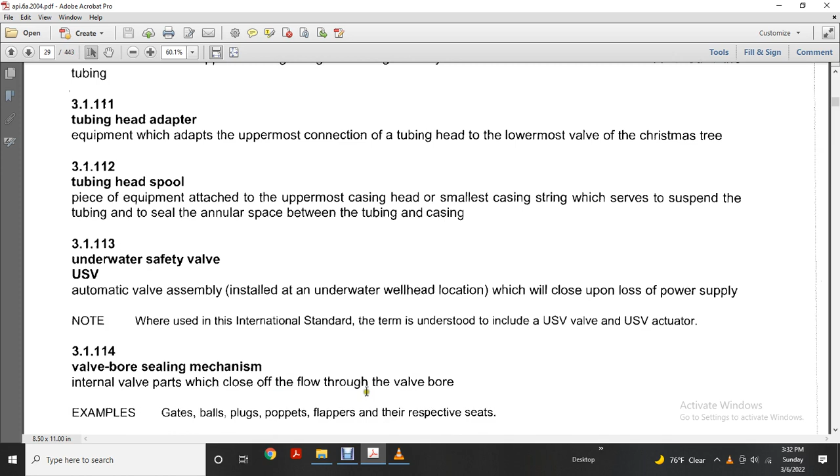Underwater safety valve: automatic valve assembly installed at an underwater wellhead location which will close upon loss of power supply. Note: when used in this international standard, the term is understood to include a USV valve and a USV actuator. Valve bore sealing mechanisms: internal valve parts which close off the flow through the valve bore. Examples: gates, balls, plugs, poppets, flappers, and their respective seats.

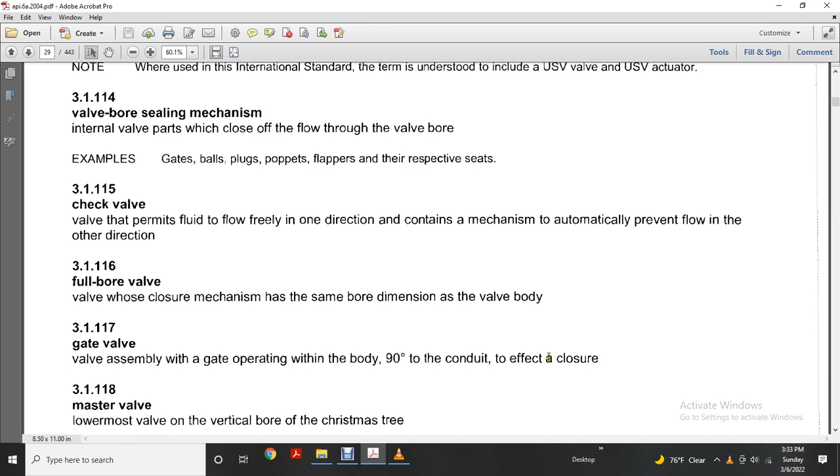Check valve: valve that permits fluid flow freely in one direction and contains a mechanism to automatically prevent flow in the other direction. Full bore valve: valve whose closure mechanism has the same bore dimension as the valve body. Gate valve: valve assembly with a gate operating within the body at 90 degrees to the conduit to effect closure. Master valve: lowermost valve on the vertical bore of the Christmas tree. Note: it is used to completely shut in the well.

Plug valve: valve assembly with a plug, manually operated, in the conduit, rotated 90 degrees to effect closure. Example plugs may be straight, tapered, ball, etc. Reduced opening valve: valve with either a regular or venturi type opening, either circular or non-circular, through the closure mechanism. Swab valve or crown valve: uppermost valve on the vertical bore of the Christmas tree above the flow line outlet. Venturi valve: reduced opening valve with a transition from the flow opening to the reduced closure area that is well streamlined to reduce pressure loss.

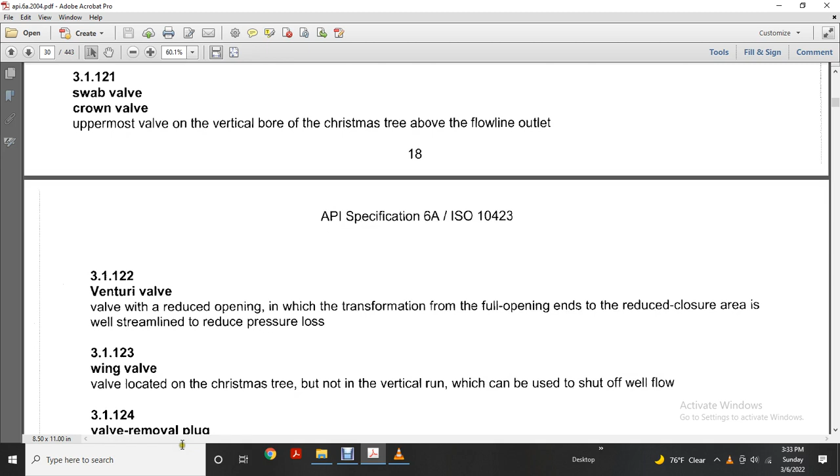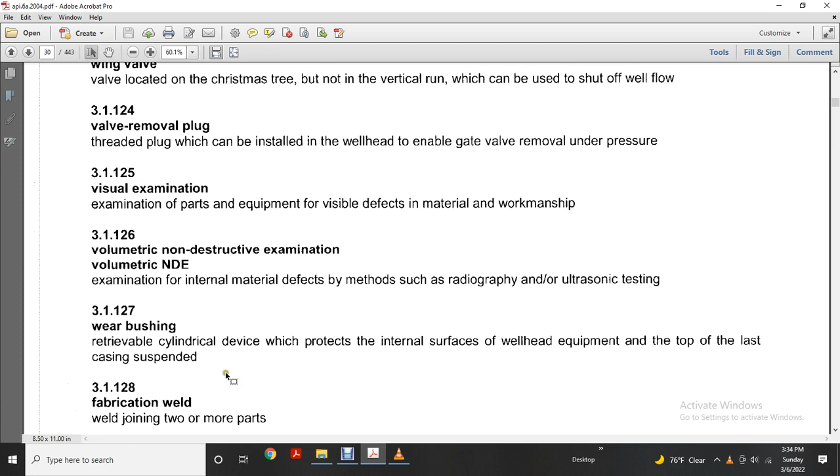Wing valve: valve located on the Christmas tree but not in the vertical run, which can be used to shut off the well flow. Valve removal plug: threaded plug that can be installed in the wellhead to enable gate valve removal under pressure. Visual examination: examination of parts and equipment for visible defects in material and workmanship. Volumetric non-destructive examination: examination for internal material defects by methods such as radiography and ultrasonic testing. Wear bushing: retrievable cylindrical device which protects the internal surfaces of the wellhead equipment and the top of the last casing suspended.

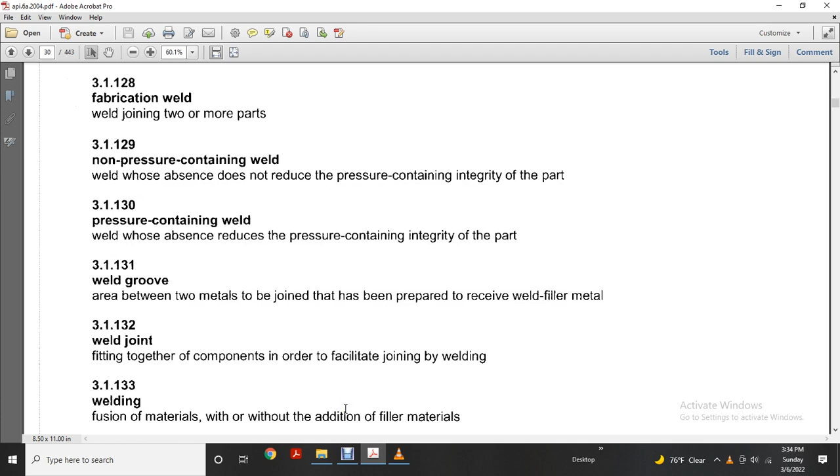Fabrication weld: weld joining two or more parts. Non-pressure containing weld: weld whose absence does not reduce the pressure containing integrity of the part. Pressure containing weld: weld whose absence reduces the pressure containing integrity of the part. Weld groove: area between two metals to be joined that has been prepared to receive weld filler metal. Weld joint: fitting together of components in order to facilitate joining by welding, fusing materials with or without adding filler materials.

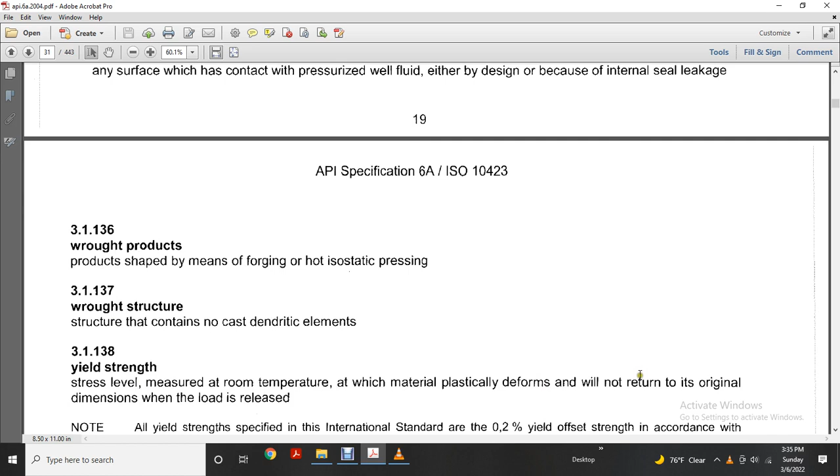Wellhead: all permanent equipment between the uppermost portion of the surface casing and the tubing head adapter connection. Wetted surface: any surface which has contact with pressurized well fluid, either by design or because of internal seal leaks. Wrought products: products shaped by means of forging or hot isostatic pressing; wrought structure contains no cast dendritic elements. Yield strength: stress level, measured at room temperature, at which material plastically deforms and will not return to its original dimensions when the load is released. Note: all yield strengths specified in this international standard are the 0.2% yield offset strength in accordance with ASTM A370.

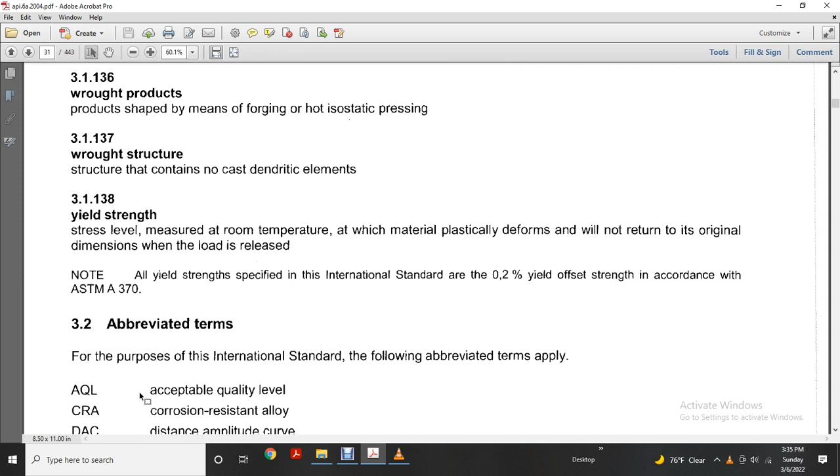3.2 Abbreviated terms. For the purposes of this international standard, the following terms apply. AQL, acceptable quality level; CRA, corrosion resistant alloy; DAC, distance amplitude curve; ER, equivalent round; FEA, finite element analysis; HAZ, heat affected zone; HBW, Brinell hardness; HIP, hot isostatic pressing; HRB, Rockwell hardness scale B; HRC, Rockwell hardness scale C; NDE, non-destructive examination; NPT, national pipe thread; OEC, other end connection; OEM, original equipment manufacturer; PQR, procedure qualification record;

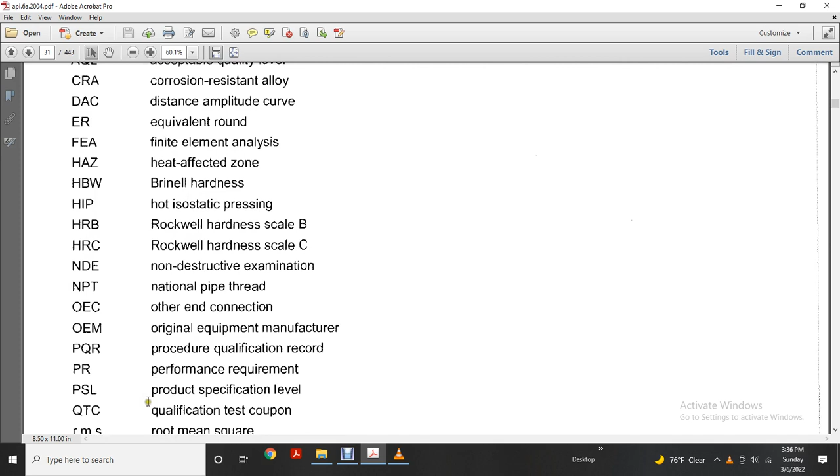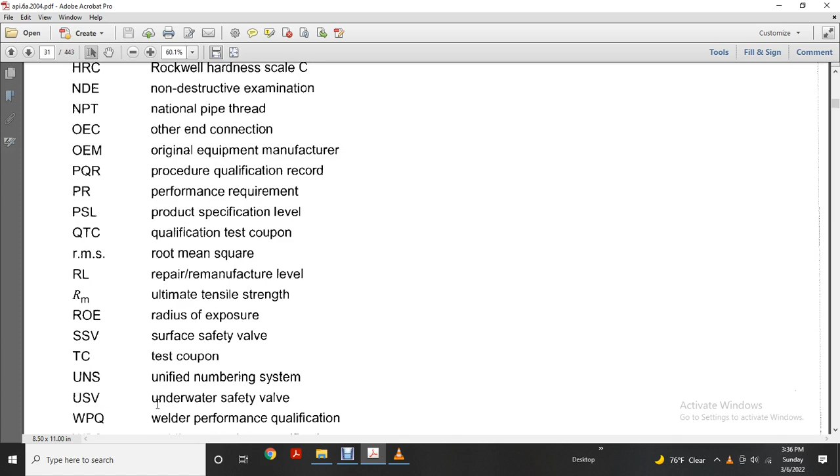PR, performance requirements; PSL, product specification level; QTC, qualification test coupon; RMS, root mean squared; RL, repair/remanufacture level; RM, ultimate tensile strength; ROE, radius of exposure; SSV, surface safety valve; TC, test coupon; UNS, unified numbering system; USV, underwater safety valve; WPQ, welder performance qualification; WPS, welding procedure specification. Chapter 4, design, performance and general requirements.